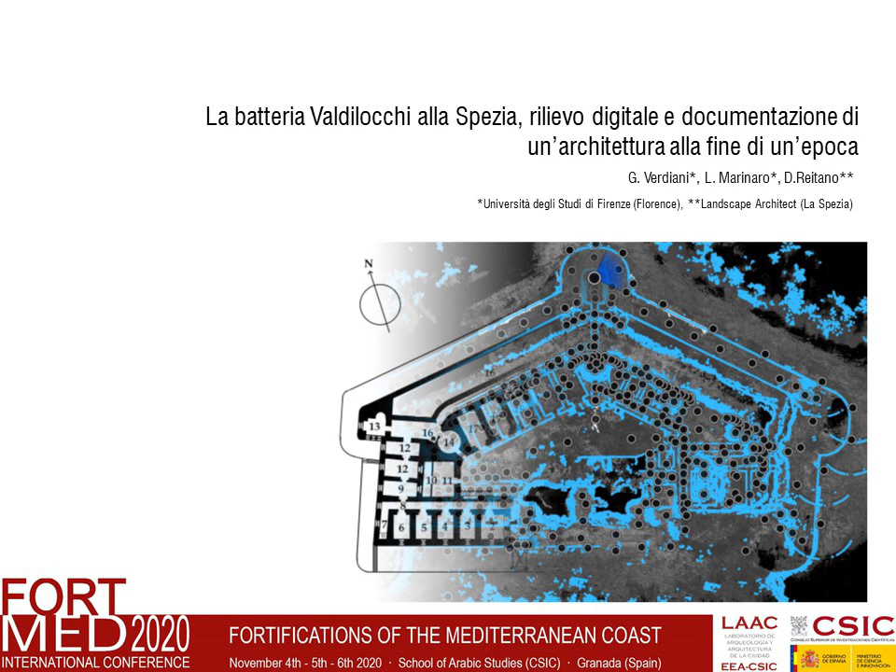Since the first edition of the Fortmed conference, the set of researchers this contribution belongs to has brought to the attention of the scientific community the conspicuous military heritage of the Gulf of La Spezia and its great landscape value, since it constitutes a territorial defense system that is unique in Europe for its complexity and high integrity.

The construction of the military maritime arsenal and its defensive system, mainly in the period from the rise of Napoleon Bonaparte to the Second World War, determined the urban and demographic growth of the city, which in the 20th century experienced a great expansion. It informed the main structure of the landscape, making the whole Gulf a defensive machine.

The system has two fortification fronts, a sea front and a land front. To this latter belongs our battery, that was one of the first works built in 1880, with the aim of preventing entry into the Gulf from the passes towards the plain of the Magra River. Built on the top of a hill, its backward but dominant position allowed it to beat the entire plain and

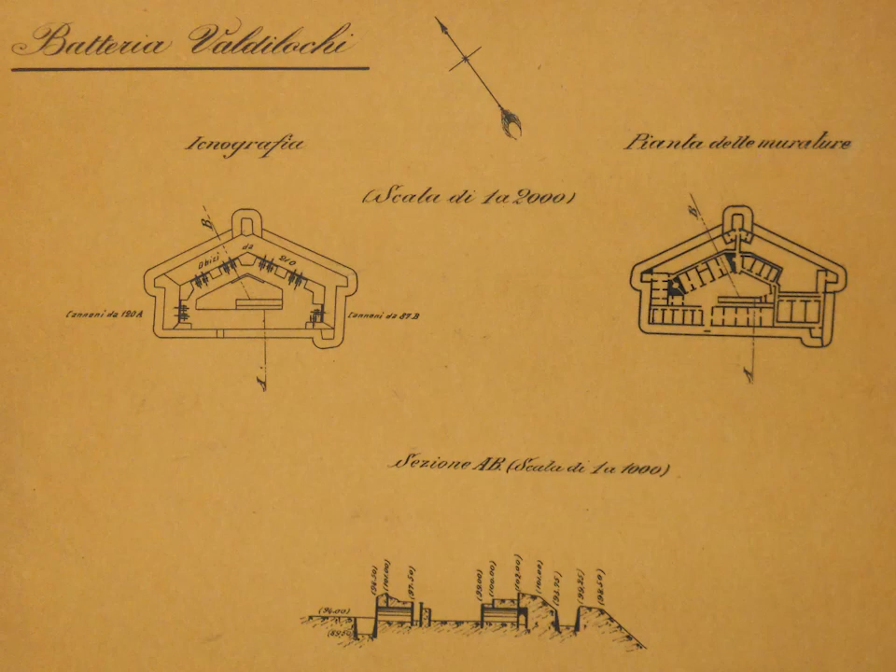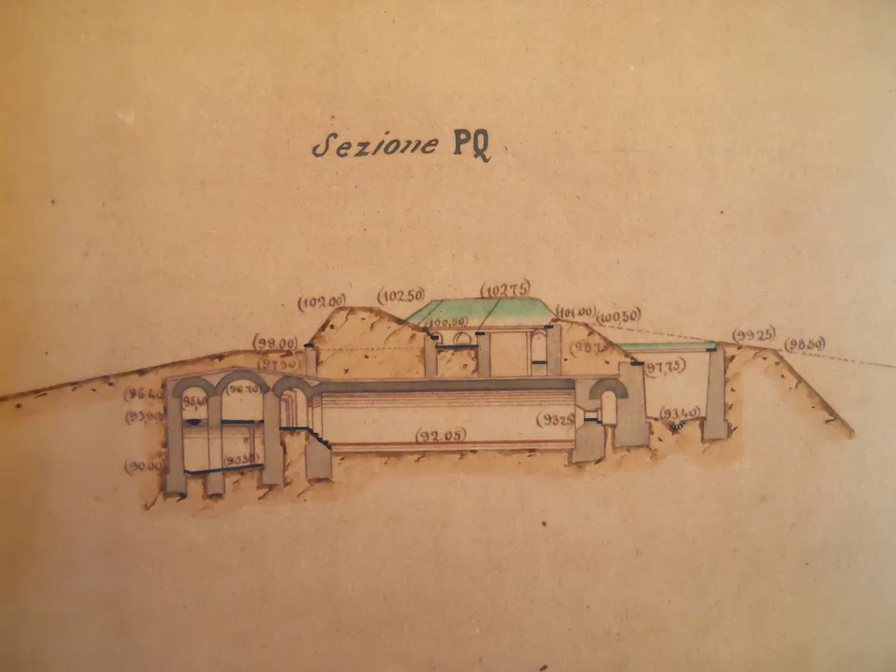its eastern entrances. The etymology suggests a link with the Latin locus, in the extended sense of a place inhabited by a family, but also a farm owned. Basically, Valdilocchi was an inhabited and cultivated valley. Perhaps, for the usual irony of destiny, today the whole hill has been completely forgotten as a consequence of the mine-laying implemented by the Germans in 1945.

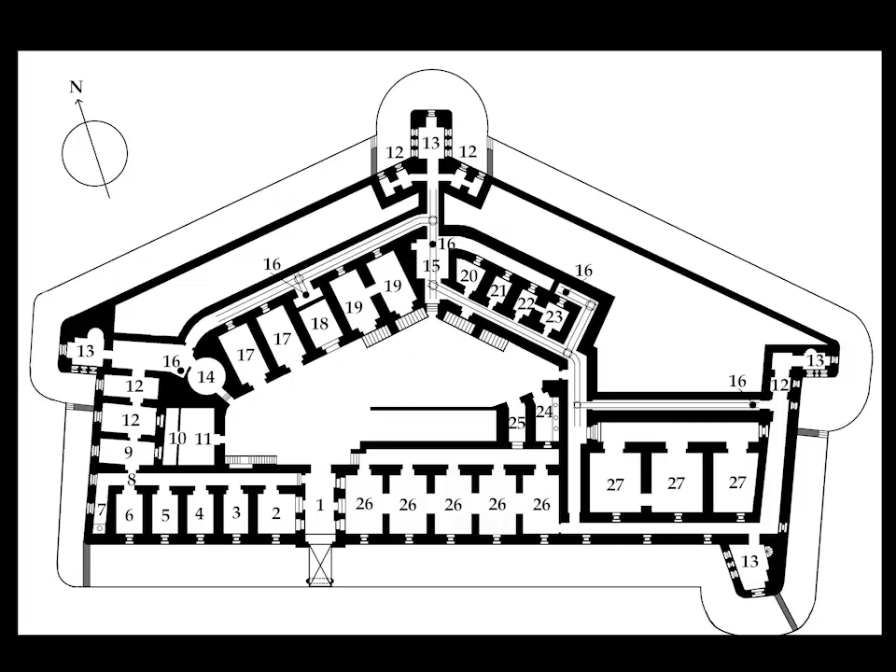Being abandoned, a pioneer forest has taken the place of fields, and the once distinctive characters of the rural landscape have been replaced by the rogue and uncertain features of the industrial and productive periphery. In the last century, some radical transformations occurred to this landscape so that the hill on which the battery stands today is firmly tight-knit in the envelope of infrastructures and fences of an urban fringe area with a mixed industrial port

and productive vocation. As documented by the archive materials, the pentagonal battery had a main front articulated on two half batteries, inclined to each other by 130 degrees and oriented to the north and northeast. The entrance opened into the gorge with a drawbridge with counterweights on a continuous dry ditch that ran around the entire structure, protected by three half batteries and an ordinary battery.

The courtyard was the heart of the building. There are various deposits and warehouses, the kitchen, the sanitary rooms, and the room with a circular plan under which a rainwater collection system was created. One of the most interesting aspects is the construction technique of the battery, which provided for its structural compartmentalization, creating walls that are not clamped together. This technological expedient has allowed the preservation and resistance of the structure despite the minings.

Following the will expressed by the municipality of La Spezia to start the recovery process of this fortification, a first intervention on the battery was started, with the cleaning operation from the weed vegetation and the subsequent digital survey, conducted between June and October 2019.

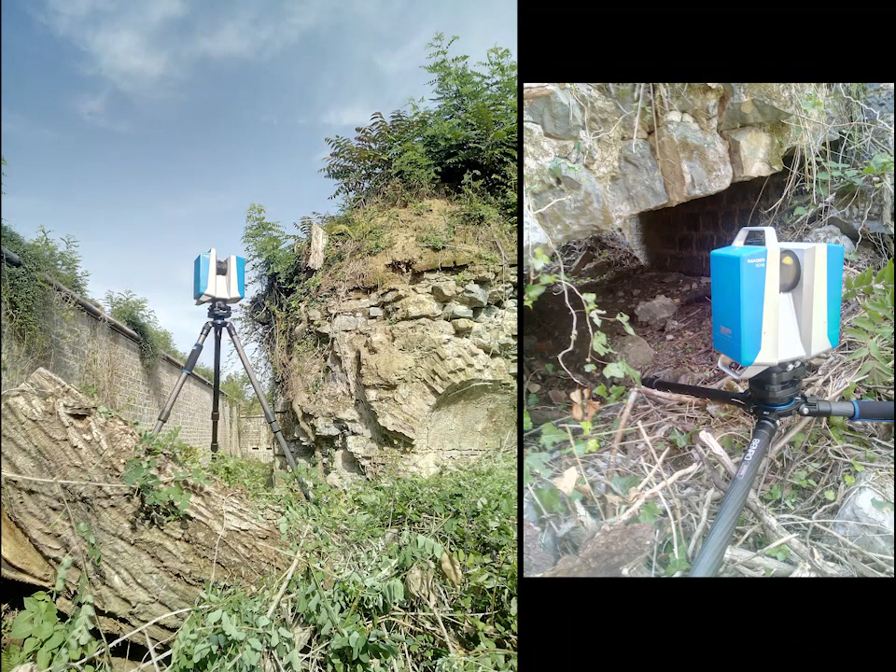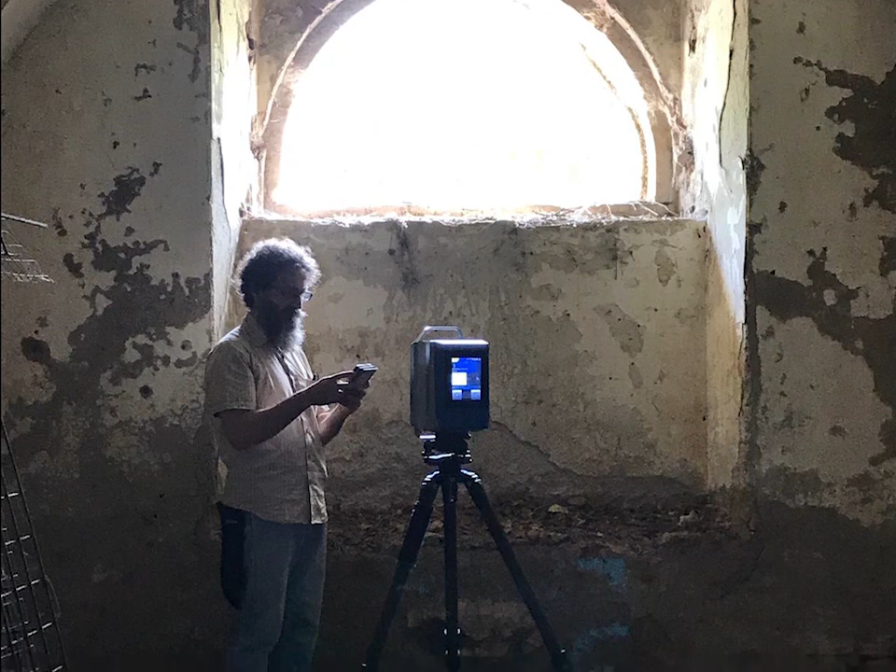Here it goes. The digital survey started in summer 2019 with the use of a phase shift scanner, used to reach all the corners, all the elements, all the areas in the fortress. This was done obviously for all the exterior part and all the internal areas. And this took about 1 week overall in 2 different campaigns, producing 405 scans.

The final point cloud, once aligned, covers correctly all the elements, all the details, all the masonry, and all the terrain in the area. This was quite important because it allowed a clear detection of all the ruins, especially in the area broken by the bombs, and to have the shape of the terrain with an easy-to-read difference between the soil, the terrain, and the masonry.

So it was also a way to get a full description of all the vaults, the details, the shape of the elements, and have easy access to sections, to passages, and all the elements reachable by the laser scan signal.

For some meaningful elements, some meaningful rooms, photography was taken as well from the scanner to have a colored point cloud with all the details, as we can see in these images. So it's possible to have all the wall texture with the remains of plaster, the details of the cracks, and all the elements that create the pathology, the defect, the decay in this building.

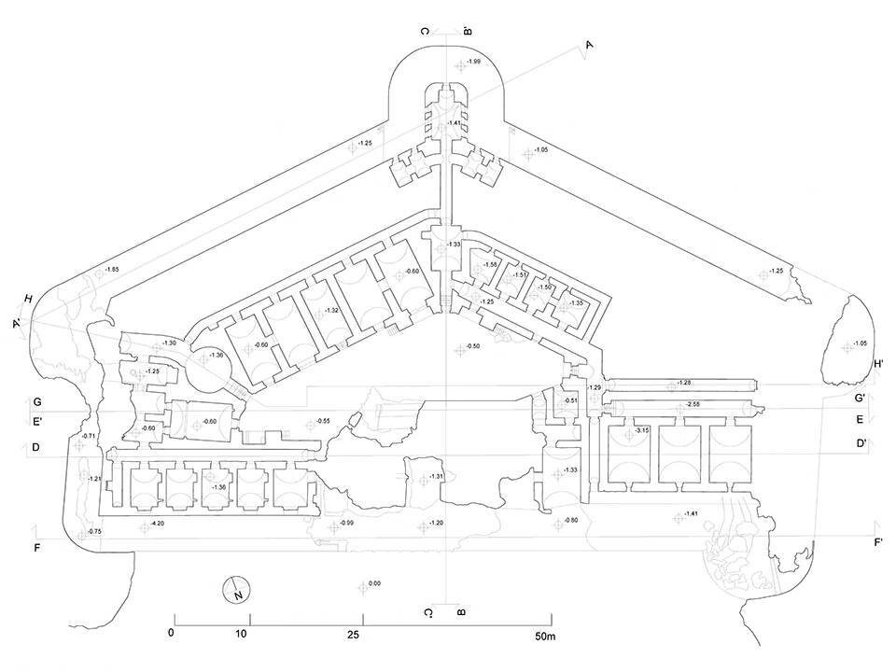This came out to be a good option because in the end it was enough to have a clear description of the masonry, of the various elements from nature and from the building, and then it was used as a base for creating the classical 2D views, 2D drawings that were well implemented in the classic procedures of the technical office of the municipality. So in this way we have the main plan view,

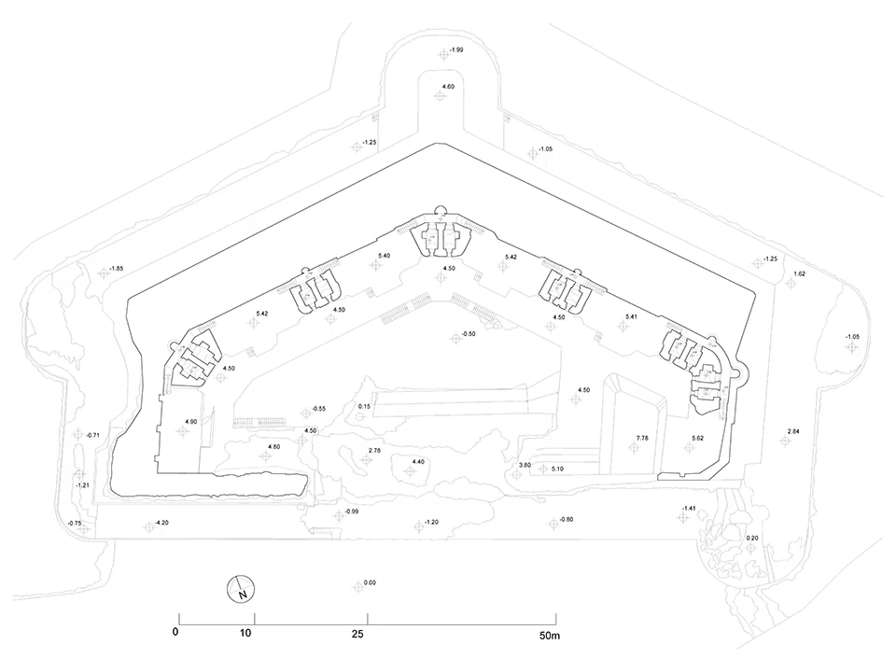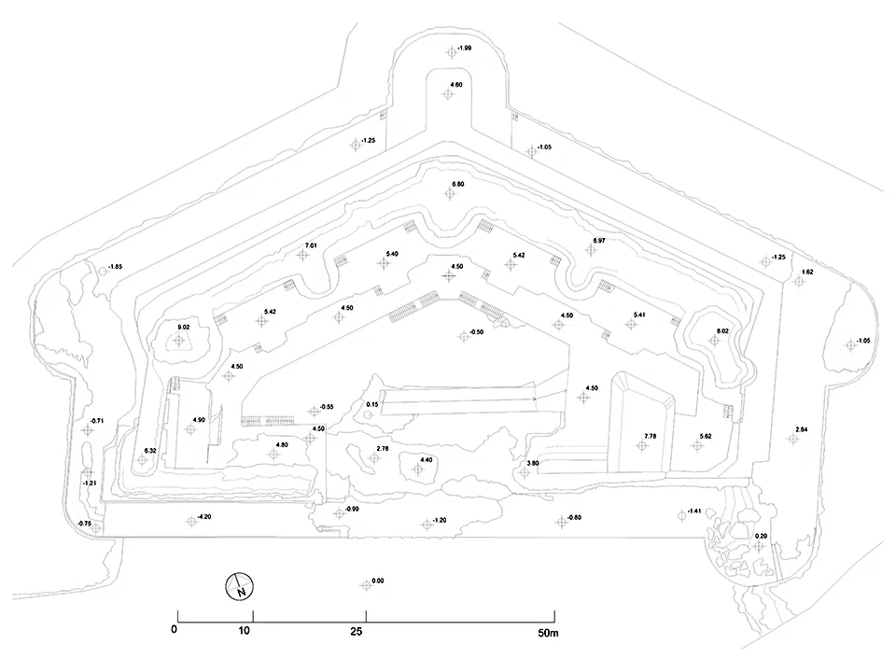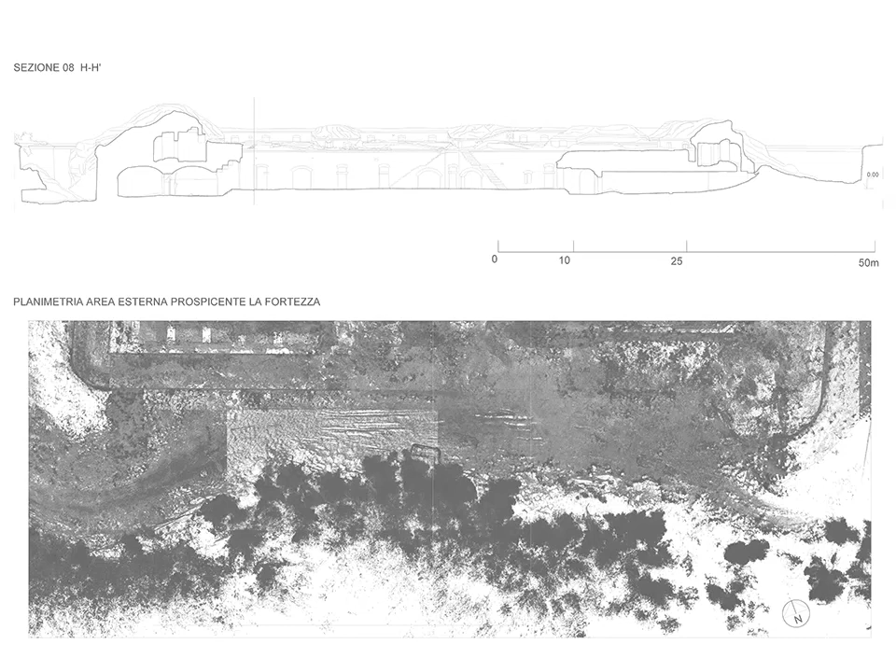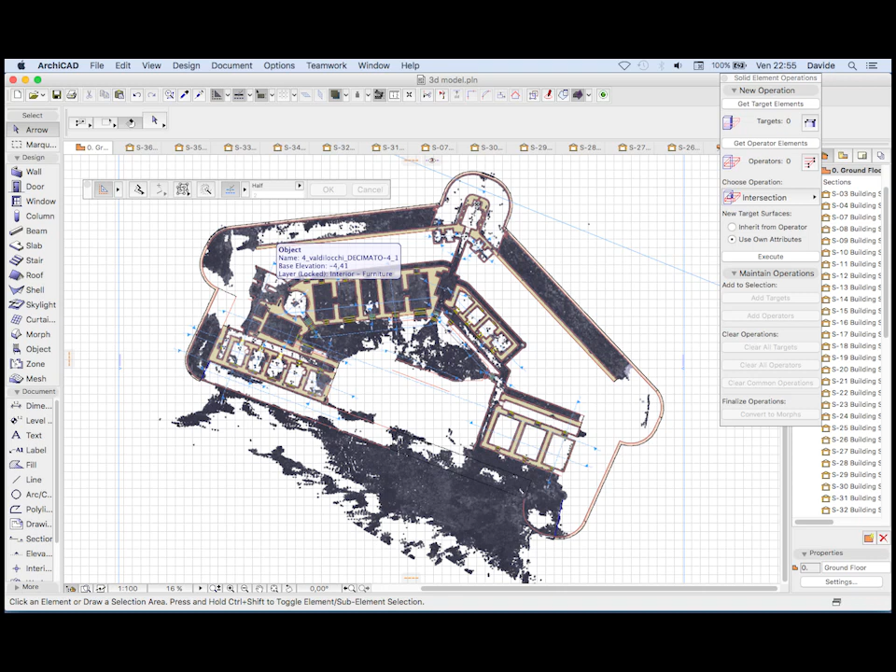Then the 3D model, the point cloud, was used to generate a base for BIM management of the fortress, creating a model that allows control of each part in parametric design, subdividing the walls, the various elements that make the fortress. All the artifacts were divided and recreated using a parametric modeling tool.

In this case, by a requirement from the technical office of the La Spezia municipality, ArchiCAD from Graphisoft was used. And this created the general model of the fortress, a complete 3D model available for the municipality to manage the fortress itself.